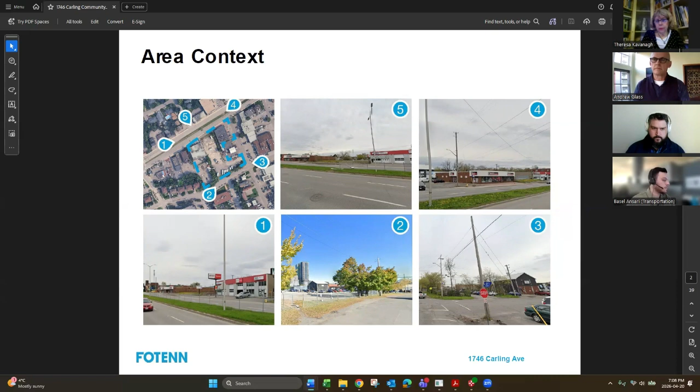The subject site is the consolidation of the following 5 properties that were acquired by the property owner to realize the potential for greater development in the area.

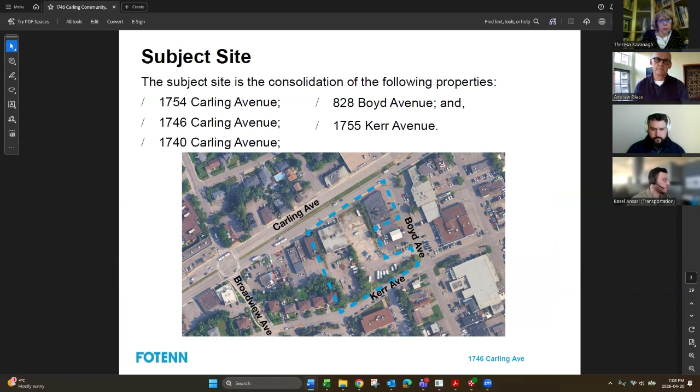The City of Ottawa has recently enacted a new zoning bylaw, 2026-50, whereas this was not yet in effect when the applications were deemed complete back in February of 2026. Between the 2 zoning bylaws, the zone boundaries do remain the same, with a portion of the lands to be zoned in accordance with the Main Street zone.

828 Boyd Avenue, that is to be the parkland, is zoned general industrial under the previous zoning bylaw, but neighborhood mixed use under the new bylaw.

We are seeking some relief from the 2008-250 old zoning provisions, as requested through the planning justification report, to introduce the high-rise use and increase the maximum permitted height of up to 32 stories or 102 meters. A site-specific schedule will be prepared that indicates where these towers can be placed, effectively limiting this height to only the approved tower footprints. Thus, we're not seeking to achieve 102 meters across the entirety of the site.

Additional zoning relief was requested to reduce the interior side yard setback for the 9-story building to the west, for the portion of the building situated more than 20 meters back from the street, whereas it did meet the setback closer to the street. An amendment is additionally sought to permit indoor rooftop amenity spaces for each new tower as permitted projections to the maximum height.

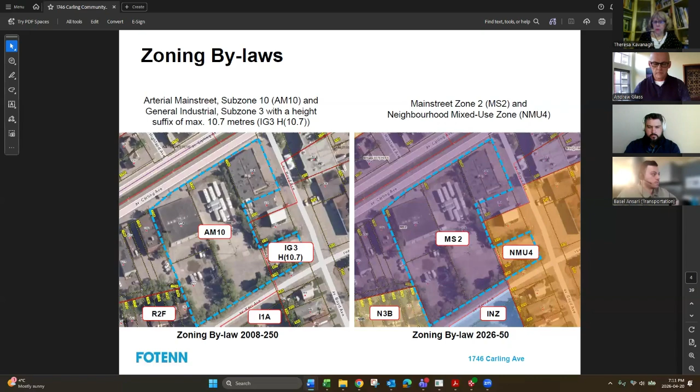Switching now to our official plan, the site is designated Main Street corridor with an evolving neighborhoods overlay within the inner urban transect of the official plan. The official plan directs this area of the city to evolve through the introduction of new residential uses, mixed commercial uses, and improved active and public transportation routes.

Through the official plan, height is sought up to 40 stories along Main Street corridors, such as Carling Avenue, where permitted. The conditions for this include when the adjacent right-of-way is greater than 30 meters wide and the parcel is of sufficient size to accommodate a tower.

Through the city-identified road widening, this section of Carling Avenue has a protected right-of-way width of 44.5 meters. Through this development application, the applicant shall dedicate additional width to the right-of-way in favor of creating new pedestrian and cycling protected spaces.

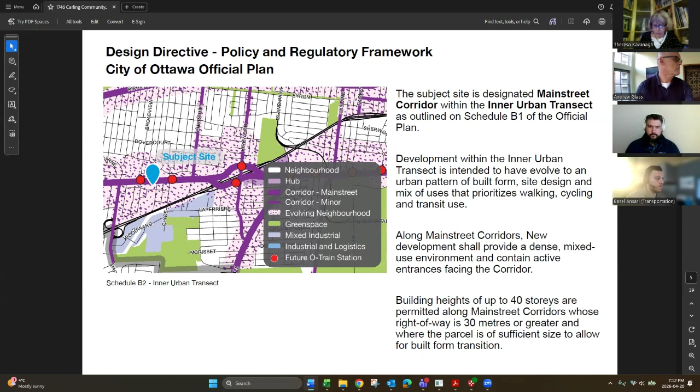I will be handing the presentation off to our architecture team at RLA to discuss the proposed design of the site, but first I just wanted to introduce the general organization.

The development proposes 4 main components: 2 mixed-use towers at 28 and 32 stories, both oriented to Carling Avenue, and a 9-story seniors residence along Kerr. At the corner of Kerr and Boyd is a proposed new neighborhood park comprised of 10% of the total lot area. The 9-story building and the parkland are phase 1 of this development.

Phase 2 will follow with Tower A, and phase 3 will be Tower B. The Carling Avenue frontage will be animated with ground floor commercial uses and newly pedestrianized areas, providing an increased road-to-building setback, complete with new street trees, street furniture, planting beds, and a bike lane.

Residential parking will be located in 3 levels of underground garages, with access from Boyd Avenue for the towers and Kerr for the seniors building. Additionally, there is some internal surface parking for visitors to the site.

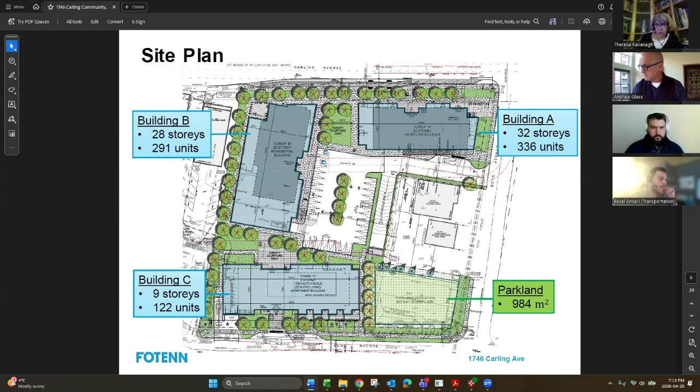Here's just a quick snapshot of the development statistics. Importantly, looking at the total unit count of 749 units, of which 627 of these are proposed within the 2 towers.

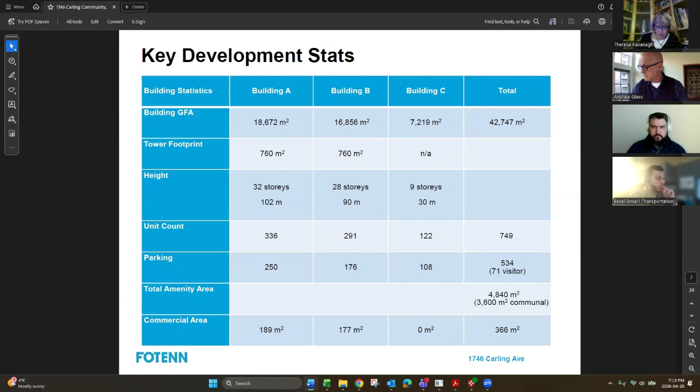Okay, and I'll hand it off to Kevin from RLA in order to get into the design.

Thank you very much. Thanks, Gabi, and good evening, everyone. Good evening, Councillor Kavanagh and members of the community. It's so good to see you all. Hopefully we've got past the winter weather here in Ottawa and we could focus on better and warmer things, and birds and flowers to come in the days to come.

And we start off here, we're just looking at the site plan, an overview of the entire proposed development area. So as Gabi had touched on, you have Carling at the top of your screen, Boyd Avenue at the right-hand side of the page, and at the south of the page, you have Kerr Avenue.

Building A in that upper right-hand corner is 32 stories and it's parallel to Carling, whereas Tower B to the left steps down to 28 stories and is perpendicular to Carling. Then you have the 9-story building along Kerr Avenue at the south of the page, with a strategically positioned internal courtyard to deal with surface parking.

We very much wanted to have a very beautiful and urban condition around the periphery of the sites, fronting all the streets.

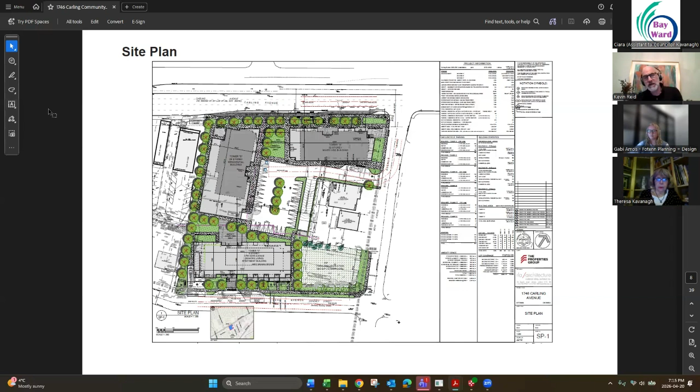This is a more detailed view of that ground floor condition. You can see at each of the 3 buildings you have a lot of non-residential uses, amenity uses. In some cases along Carling Avenue, at the building on the upper right-hand side, we have some live-work units and then commercial space at the furthest east. Building B has a similar mix of uses: a commercial unit fronting onto Carling, and then a mix of amenity uses and live-work units.

We try and deal with as much of the utility, such as garbage and recycling and bike storage, at grade for pickup and management of those uses, as well as mail and parcel delivery. Each of those is located within the lobby area of each of the 3 buildings.

We do have some ground-oriented units as well in building C, those 1-bedroom plus dens that front onto Kerr, and a really nice condition where you have a pedestrian walkway connecting with the civic walkway, the municipal walkway, and pedestrian sidewalk around the entirety of the site.

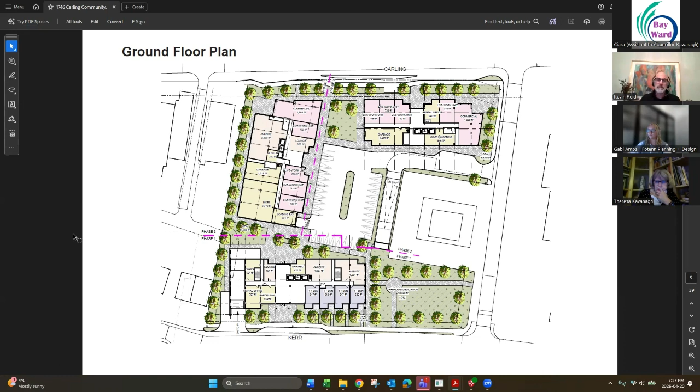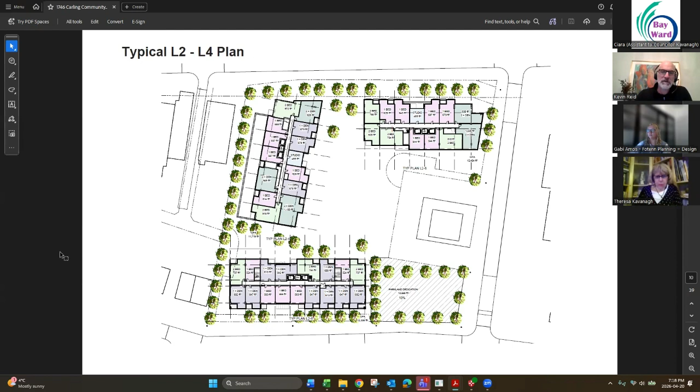So working our way up through the building, this is a typical level 2 to level 4 of the buildings. You can see that on each of the floors we have a nice mix of anywhere from studio units and 1-bedrooms to 1-bedroom plus dens, 2-bedroom units, 2-bedroom plus dens, and in some cases the largest configuration of 3-bedroom units.

Some elevations. This is building A, the tallest on the left-hand side of your page. This would be from the north side of the proposed development on Carling Avenue, looking back towards the site. You have that parallel orientation of building A on your left, and then the perpendicular orientation of building B as you step down to that 28-story development on the right-hand side of the page towards the west.

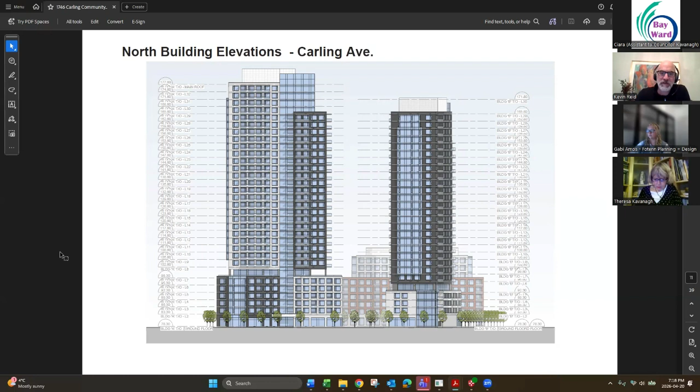This is a view to the east, which would be Boyd Avenue, looking back with Carling Ave to the right-hand side of the page. At that corner you have the highest proposed structure, building A. Then the lowest proposed, on Kerr at page left, is the 9-story building, with the parkland dedication in the foreground there.

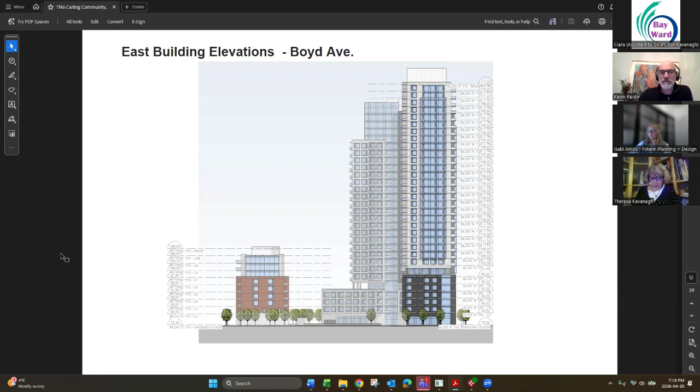This would be taken from Kerr, at the south of the proposed development, looking back towards the site. You can see that the parkland dedication establishes a nice intervening ground between Boyd, at the far right, and building C, the 9-story building in the foreground.

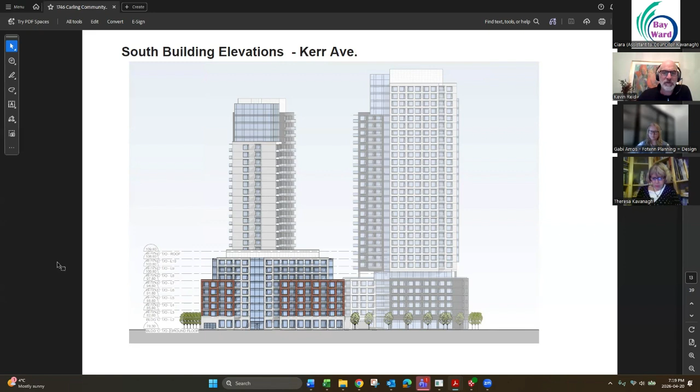A view from the west. Again you have building C on the right-hand side on Kerr, and building B, the 28-story building, on the left-hand side of the page, fronting onto Carling. So this is that view again from the west.

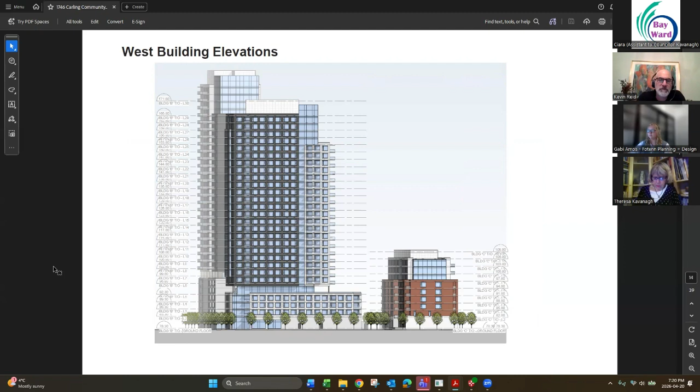Some rendered views. This would be Carling Avenue looking towards the west. You see that more prominent structure complete in the corner between Carling and Boyd, right in the foreground, and then you step down to that 28-story building just beyond that in the background.

A view from the opposite side, looking down Carling towards the east. You have building B in the foreground, building A at the left-hand side of that, and then the 9-story building C on the right-hand side, fronting onto Kerr.

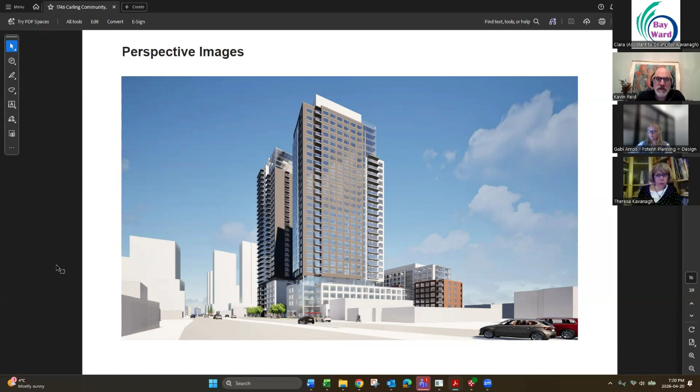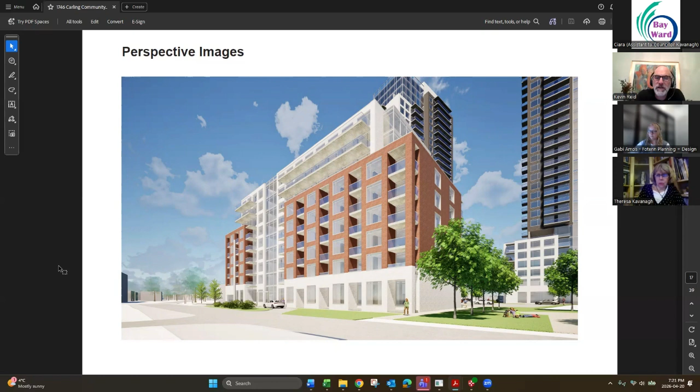This is a view from Kerr Avenue, looking towards that 9-story building. We wanted to really differentiate this building from the high-rise conditions that you see on Carling, so the idea is that you have a difference in the color of the masonry, just to give it a more domestic condition and fit and finish on that Kerr Avenue. As you can see on the right-hand side there, there's that parkland dedication.

These are some views of the internal courtyard. On the lower part of the screen you have building B on the left, building A on the right. As you move toward the right-hand side of the page, building B is on the right, and you're looking through that threshold condition from Carling Avenue.

You can see building C in the background at the back of the courtyard. On the upper left-hand side, this is the backside, the roadside, Carling Avenue and Boyd corner there. So you're looking at that commercial condition at building A there.

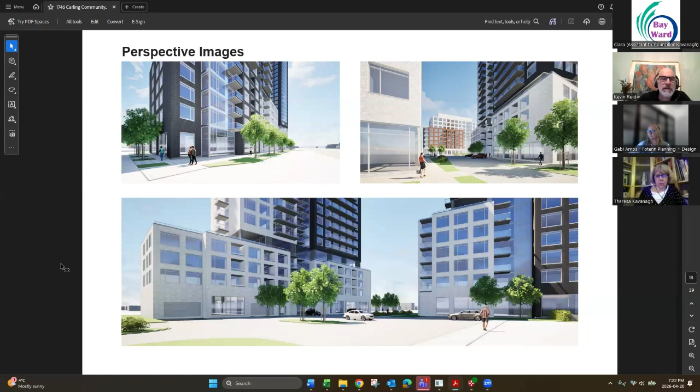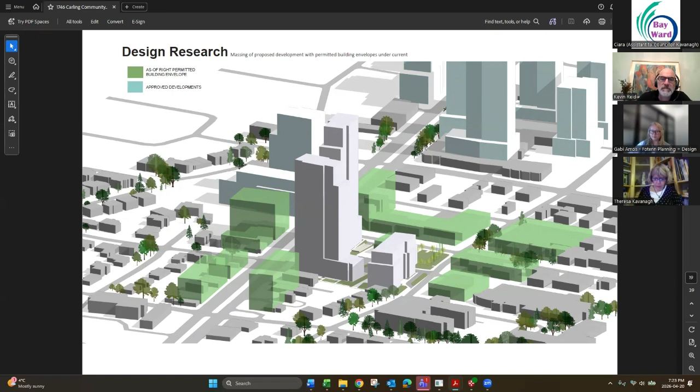Gabi, did you want me to touch on the next slide, or did you want Basel to discuss transportation and that kind of stuff? Yeah, let's hand it over to our transportation expert. We do have some additional slides with more materials from RLA if there are more questions, but in the interest of time, we'll let Basel take it away with transportation.

Thanks, Kevin and Gabi. Good evening, everyone. I'm going to take a few minutes to go through some of the transportation elements being proposed for the site.

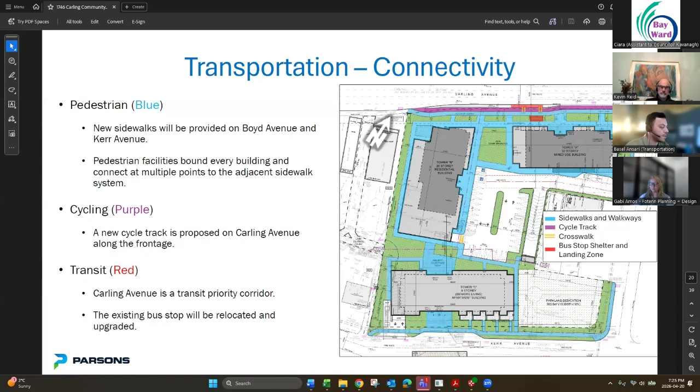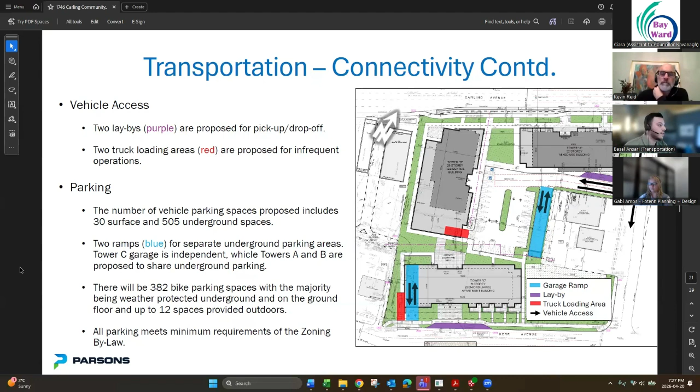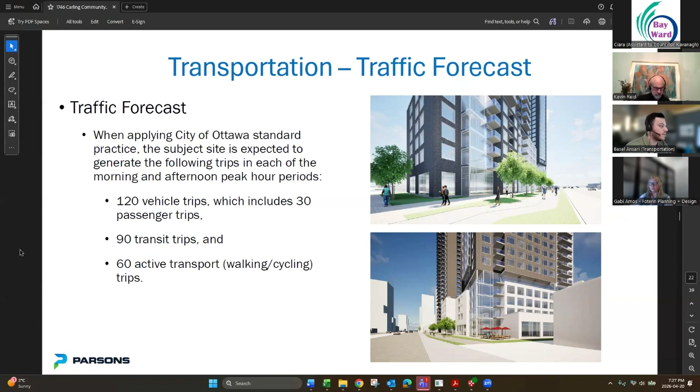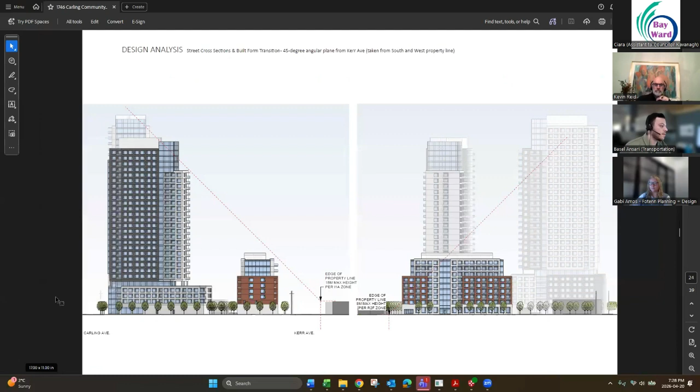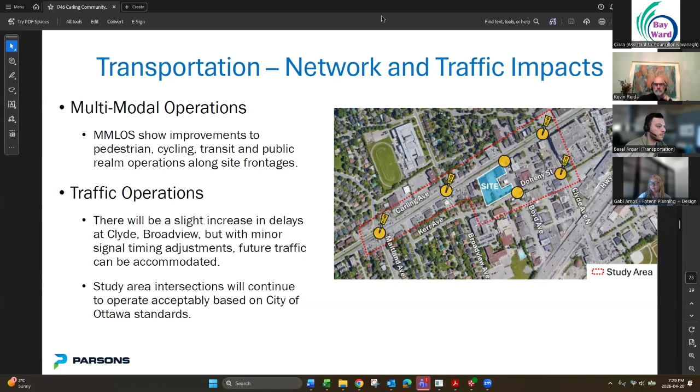Thanks so much, Gabi, and thanks to everyone for presenting. I'm actually going to pass it back to Councillor Kavanagh because we've just been chatting, looking at the number of panelists. So I'll pass it over to Councillor Kavanagh.